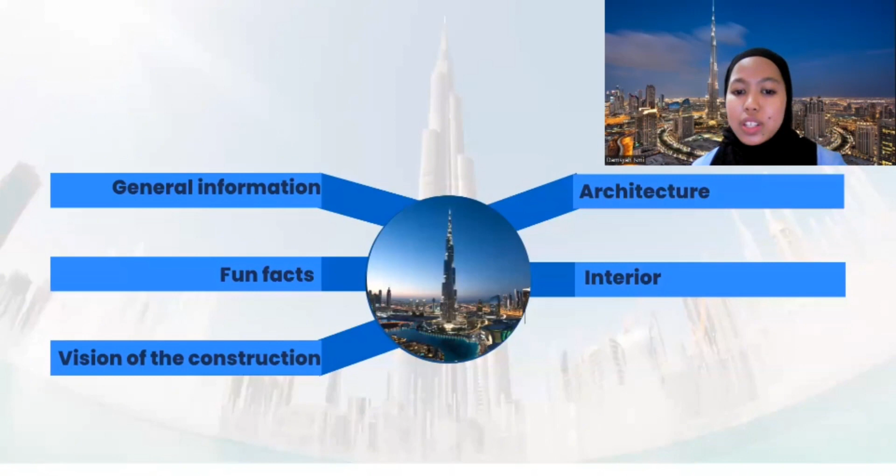To start with, I will give you some general information about this building. After that, I'll tell you some fun facts about this skyscraper. Then I'll explain the vision of the construction, also the architecture of this building. And finally, I'll show you the interior of this building. I'd be glad to answer any of your questions after my presentation.

Okay, first of all, let's talk about some general information of Burj Khalifa. You can see that Burj Khalifa is almost 3 times the Eiffel Tower. It has 828 meters with 163 floors. So I've told you some general information about this building.

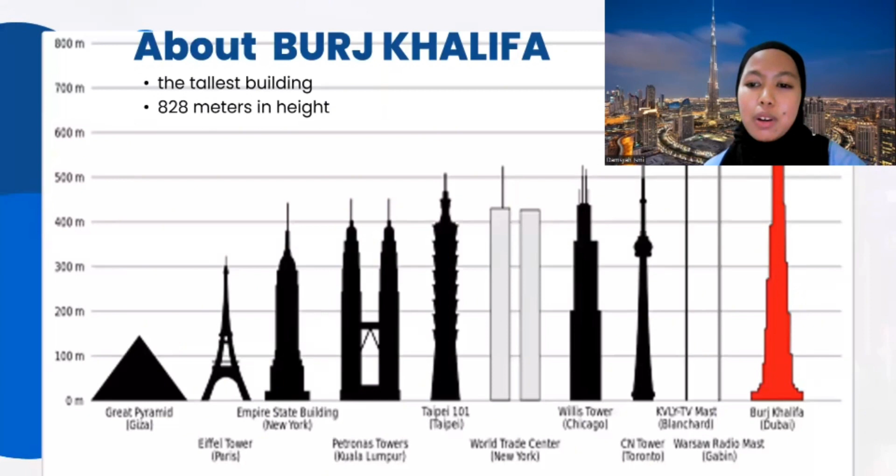Next, does Burj Khalifa have some fun facts? Of course, it has. First, there are a few deaths, such as an incident on 10 May 2011. An Asian immigrant jumped from the 147th floor onto the 108th floor deck. Before that, in March 2006, about 2,500 workers protested and triggered a riot.

Second, the weight of Burj Khalifa is the same as 100,000 elephants. And then the exterior of the Burj Khalifa is covered with 26,000 glass panels, all cut individually by human hands. That's impressive. And then the aluminum used to build Burj Khalifa weighs as much as 5 Airbus A380 airliners.

And then there is no septic tank. Why doesn't the Burj Khalifa have a septic tank? Do you know what the reason is? Because it is not connected to the city's sewage system. Managers employ creative but disgusting ways to dispose of waste. Every day, a collection of waste trucks moves to the Burj Khalifa and lifts the dirt.

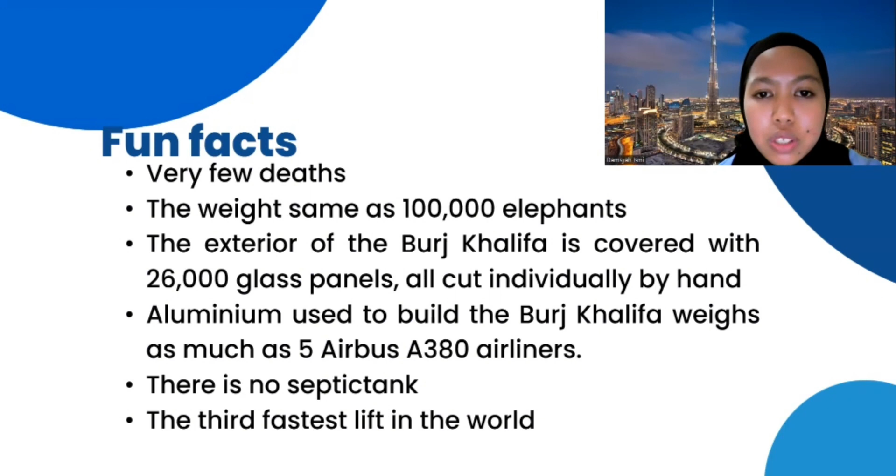Let me turn now to the vision of the construction. Burj Khalifa will be the tallest man-made structure in the world. It will be a home, a base, hotel, residential apartments, etc., with tourist attractions and a showcase for engineering. This building can also represent the largest global power or economy at the time of the construction. That's all I have to say about the vision of Burj Khalifa.

Let me turn now to the architecture of Burj Khalifa. You can see from the figure the modular Y-shaped structure. The Burj Khalifa employs a Y-shaped floor plan. This plan provides higher performance and provides a full view of the Persian Gulf. The shape and the upward setbacks help the structure to reduce the wind forces acting on the structure. The shape was finally fixed based on a series of wind tunnel tests.

The structural system employed for Burj Khalifa can be called the buttressed core system. The whole system is constructed using high-performance concrete walls. So we have looked at the architecture of Burj Khalifa.

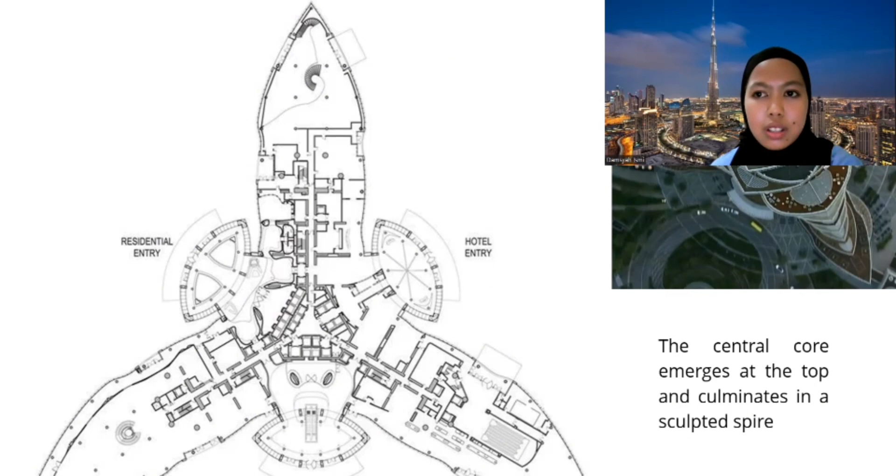Next, I'll show you the sketch designs of Burj Khalifa. You can see that it looks like a central core. The center core emerges at the top and culminates in a sculpted spire. A Y-shaped floor plan maximizes views of the Arabian Gulf. Viewed from the base or the air, Burj Khalifa is evocative of the onion domes prevalent in Islamic architecture.

Its wings, one, two, three wings, buttress each other through a hexagonal central core. The central core has a higher torsional resistance. The structure is designed for wind force and related effects. There are corridor walls that extend from the central core to the end of the wing. So this, from there to there.

At the end, these walls are thickened by means of hammerhead walls. These walls resist wind shears and moments by acting like the web and the flange of a beam. There are perimeter columns which are connected to the mechanical floors. The connections between the perimeter columns and the mechanical floors are provided by means of outrigger walls. These help to resist higher wind loads laterally.

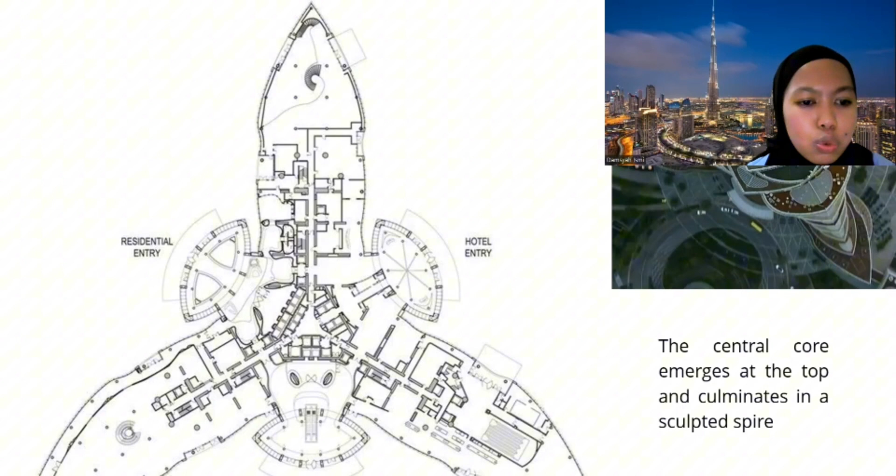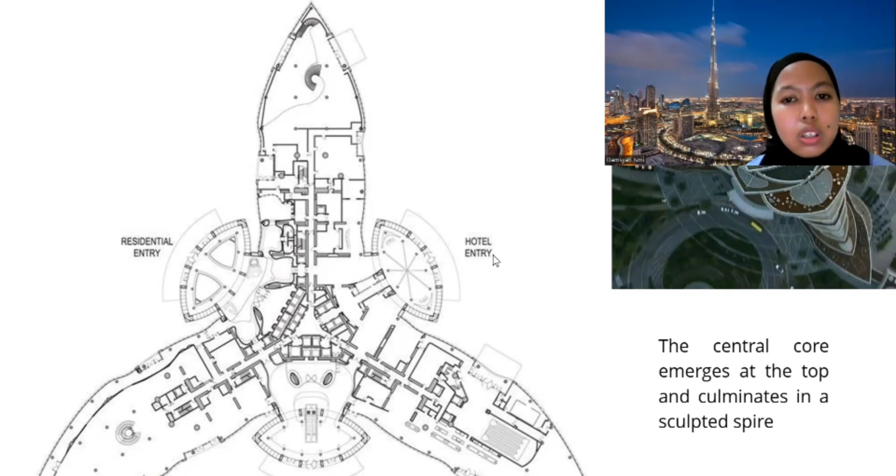The outrigger depth is 3 stories each. There is periodic occurrence of the outrigger system through the height of the tower. Well, I've told you about the sketch designs of Burj Khalifa. Next, we'll move on to why the construction is strong and stable.

First, it has a reinforced concrete core. The Burj Khalifa has a central reinforced concrete core that acts as the building's backbone. This core provides crucial vertical support and houses the building's elevators, stairwells, and other utilities.

And the second, Y-shaped design. The tower's Y-shaped design is not only an architectural marvel, but also enhances its structural stability. The Y-shape helps distribute the building's mass and wind loads more effectively.

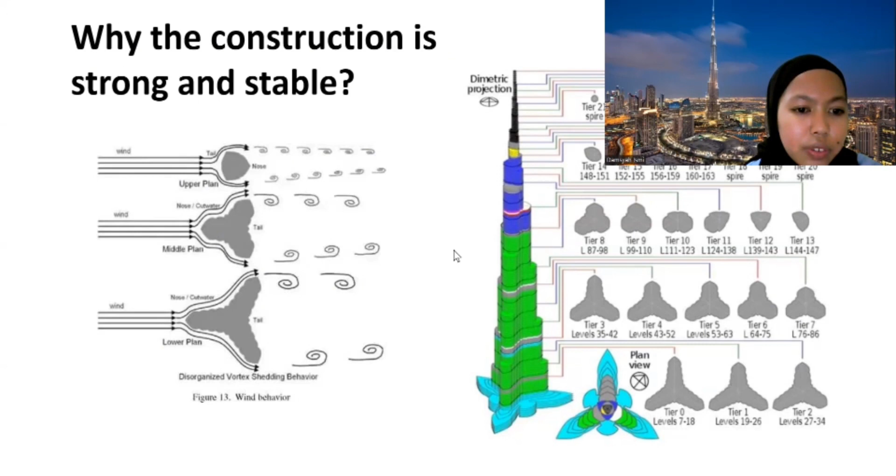And last, it uses high-strength materials. High-strength materials, concrete and steel, were used in the construction of the Burj Khalifa to ensure the structural integrity required for such a towering structure. Well, I've told you about what the construction strength is.

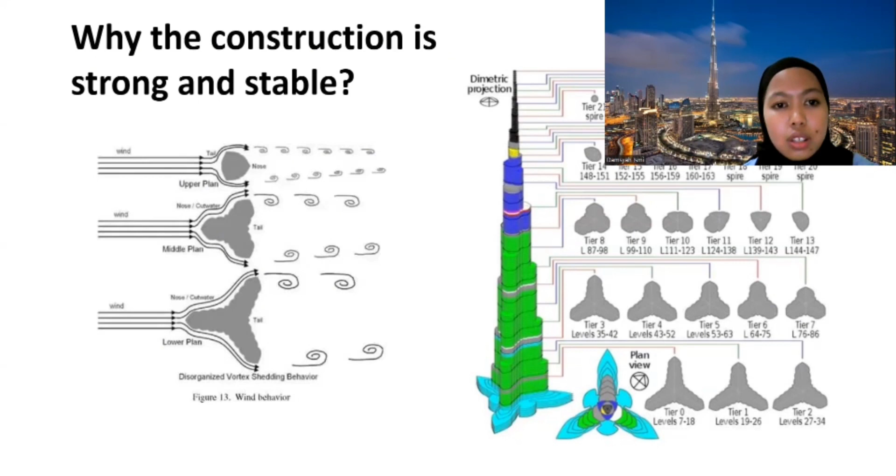Let me turn now to the foundation that is electrified. The secret to the Burj Khalifa's foundation is the pillars beneath the foundations. That's the pillars. Hold on. Its depth is the same as 10 floors of the Burj Khalifa, which functions to withstand frictional forces.

The piles under the foundation are electrified 24 hours a day. Otherwise, salt water from the sea that seeps in will damage the pile reinforcement. This technique adapts the physical theory of electrolysis, the principle of cathode and anode in batteries, to prevent corrosion.

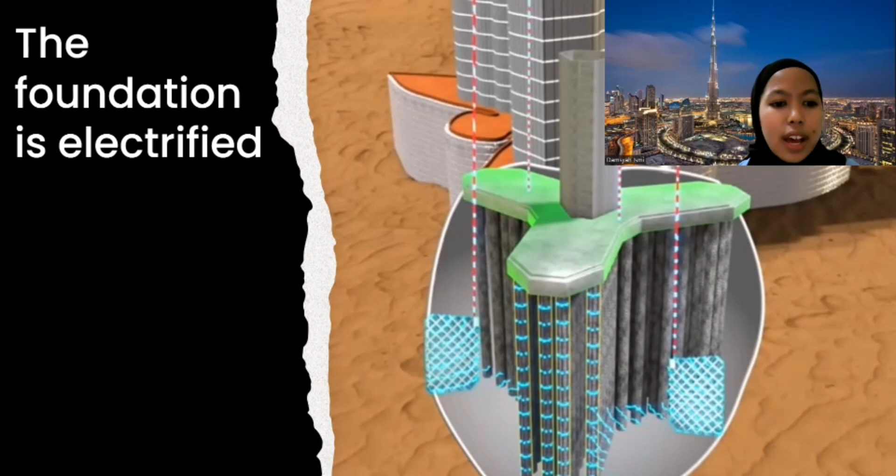While I've told you about the foundation being electrified, let me turn now to the hexagonal core. Like humans, the soul of the Burj Khalifa is a hexagonal building. You can see from the figure, it is hexagonal. 1, 2, 3, 4, 5, 6. You can call that a hexagon.

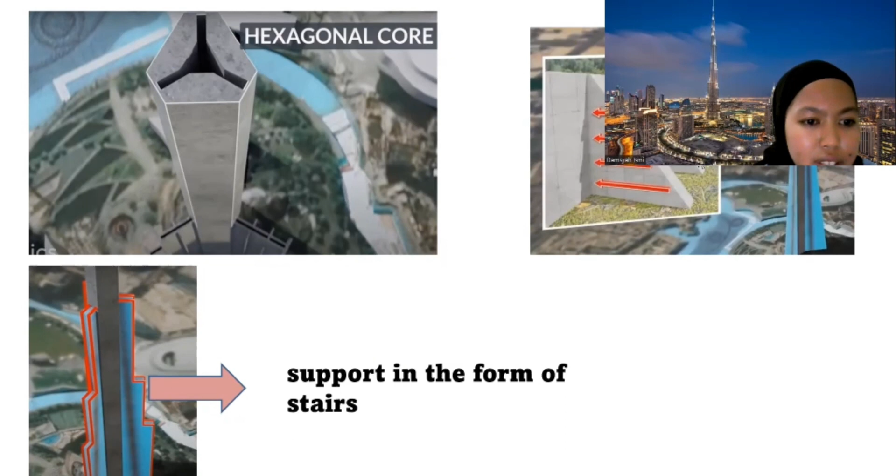The hexagonal core of the building is wrapped around by the outer walls. You can see from the figure. It is the main hero of why the Burj Khalifa can remain standing, braving lightning and desert storms in Dubai. The slender hexagonal core is encased by stair-shaped supports. This is called stair-shaped support. These supports are inspired by the style of dam walls,

so that the hexagonal core building inside stands strong. The design's glass facades in cross section provide stunning views of all the hotel and guest rooms from all sides. Well, I've told you about the hexagonal core of this building.

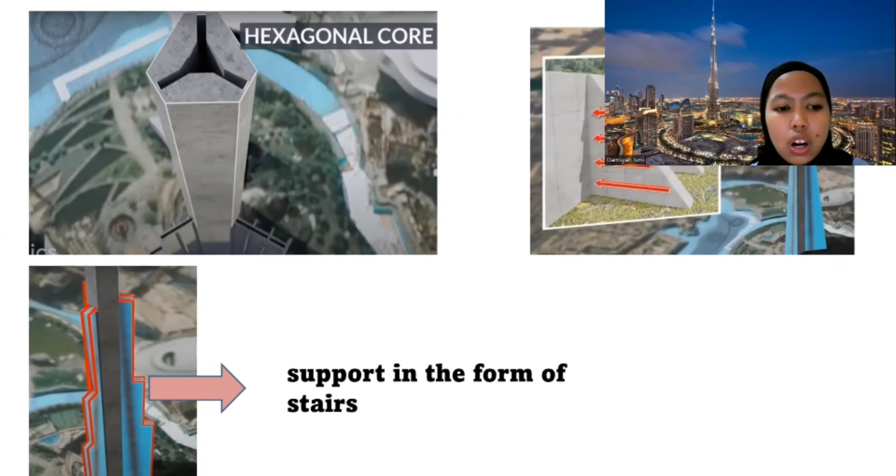Now, let me turn to the superstructure of Burj Khalifa. The superstructure of Burj Khalifa is supported over a large reinforced concrete raft. This raft is supported by bored reinforced concrete piles. The raft has a thickness of 3.7 meters and was constructed in 4 separate pours.

The grade of the concrete raft is C50 with self-consolidating concrete. The concrete volume used in the raft is 12,500 cubic meters. The number of piles used was 194. The piles were 1.5 meters in diameter and have a length of 43 meters. Each pile has a capacity of 3,000 tons.

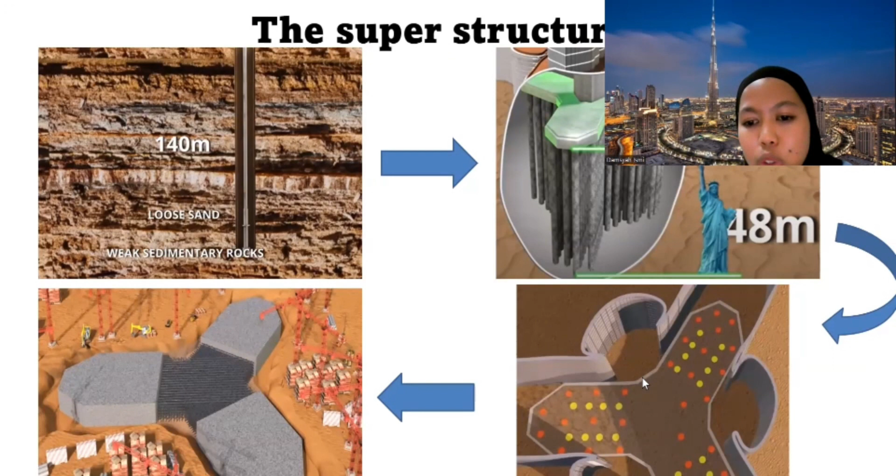The concrete grade used in the piles was C60 SCC concrete, which was placed by the tremie method. This utilizes polymer slurry to carry out the process. To resist the detrimental effects of chemicals, cathodic protection was provided. Well, I've told you about the superstructure of Burj Khalifa.

Next, the asymmetrical design structure. Why did the designers of this extraordinary structure choose an asymmetrical design? When wind passes over a structure, it can cause a very beautiful and dangerous fluid mechanics phenomenon called vortex shedding. So the walls of the building are made into hidden spirals, like this figure. It makes a spiral way.

So the walls of the buildings are made into hidden spirals to release vortex shedding. These innovations succeeded in making the height of the Burj Khalifa reach 830 meters, even though initially it was only planned at 518 meters. That's all I have to say about the asymmetrical design of the Burj Khalifa.

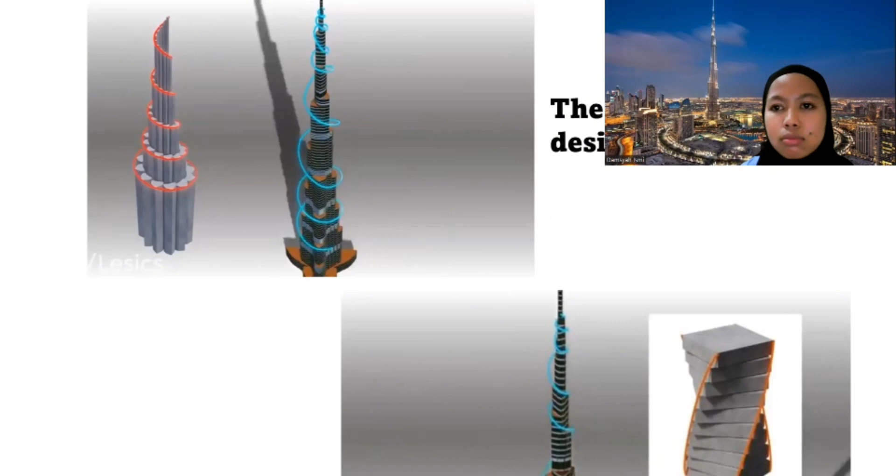We'll move to the mechanical columns of this building. If you see some black lines like this figure on the original designs of the Burj Khalifa, the line is a mechanical floor. This column has good stability when connected between floors. The floors are sturdy because they are connected to the hexagonal core's casing. On the roof, the mechanical columns contain electric and air cooling systems, water tanks, and other engineering systems. That's about the mechanical columns of Burj Khalifa.

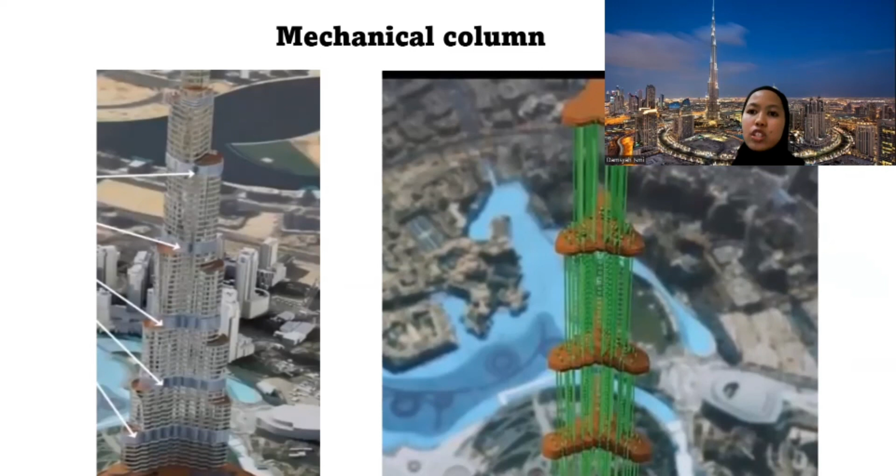Next, the three architects who designed the Burj Khalifa. First, Marshall Strabala, then George J. Efstathiou, and last, Adrian Smith. Burj Khalifa was built with modern, contemporary, and Islamic architecture, also expressionism and futurism structure.

So what's next? Oh, let me turn now to the interior. The design of Burj Khalifa was done by the Chicago office of Skidmore and inspired by local culture while staying mindful of the building's status as a global icon and residence.

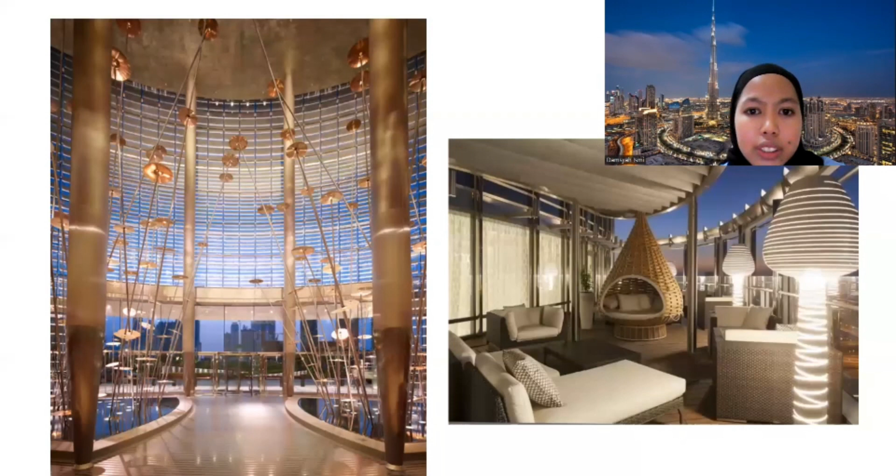Next, I'll show you some pictures of the interior, like those two. You can see it like those two. These are some pictures of the interior of the Burj Khalifa. If you want to know more, you can see it from the 360-degree Burj Khalifa interior view. That's all I have to say about the interior of Burj Khalifa.

Okay, in conclusion, Burj Khalifa is the tallest building in the world with super ideas of architecture and construction.